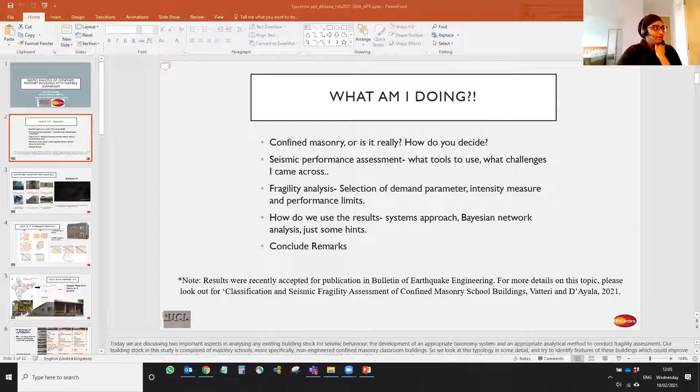Hope this is now clear, visible. Yes, it is. So today we're looking at the typology of masonry buildings with flexible diaphragms.

The typology is known as confined masonry. So first of all, we would look into this typology in a little bit of detail and see if the buildings that we are looking at are indeed confined masonry, or if it is, to what extent. Secondly, we would look into

two very important aspects of analyzing any existing building stock for their seismic behavior. We try to develop a taxonomy system that would identify the seismic resistant features of these buildings. And then we apply seismic performance and fragility analysis techniques.

You could use standard procedures and techniques for these, but I would like to highlight some of the challenges that I came across doing this. I think this would be helpful for the students who are joining our MSc programs and others who are doing similar kind of work.

So in the very final bit, I would like to just give a hint of how we are going to use these fragility curves for the multi-hazard approach Dina has mentioned in the introduction. With that, if you are into this topic, you could look out for this publication that is recently accepted with the results that I'm presenting today.

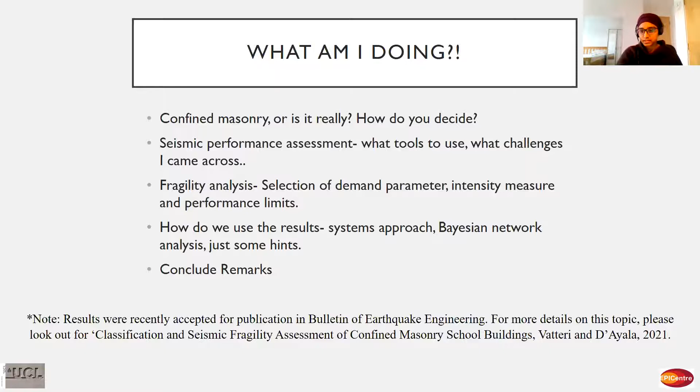So coming to this typology, many of you might be familiar with this. Confined masonry is a typology that has been in existence for more than 50 years in countries like Mexico, Chile, and Peru, where the seismic hazard is really significant.

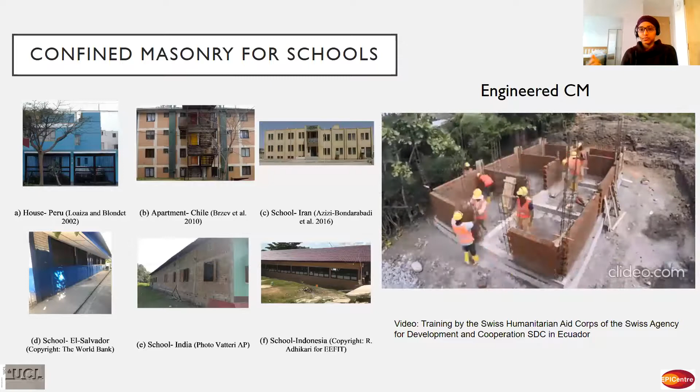This is a typology that is developed primarily from the site and then adapted to standards and codification, and now there are national and international guidelines available for this. So what it consists of is unreinforced masonry panels confined by lightly reinforced concrete elements, which tie them together like a box.

Primarily, these are used for residential buildings, up to 4 or 5-story flat structures even. But increasingly, this is being used for school structures. And as you might be aware, school buildings are inherently more vulnerable to seismic hazards because of their larger spans and larger openings and so on. So we are looking into this very interesting typology in the context of school buildings.

Also, because this is a typology primarily originated from site and improvised over time, you can see a lot of variability within this typology around the world. So we try to incorporate our attempt into how well you can classify them, the non-engineered confined masonry construction practice around the world. These kind of buildings, in the first instance, look very similar to an RC frame structure with masonry infills. So how are they different, or are they any different?

If you look in the figure on the left, the RC and CM, that's confined masonry construction, primarily differs in a number of ways. First one is the sequence of construction.

So if you noticed from the previous video, in confined masonry you build the masonry walls first, sometimes even leaving toothed edges, and then cast the RC elements. You can imagine the kind of bond that creates between the RC and the masonry. On the other hand, in RC you create the frames first and then do the infills. There's also significant difference in the relative stiffness, relative size of these elements, and reinforcement.

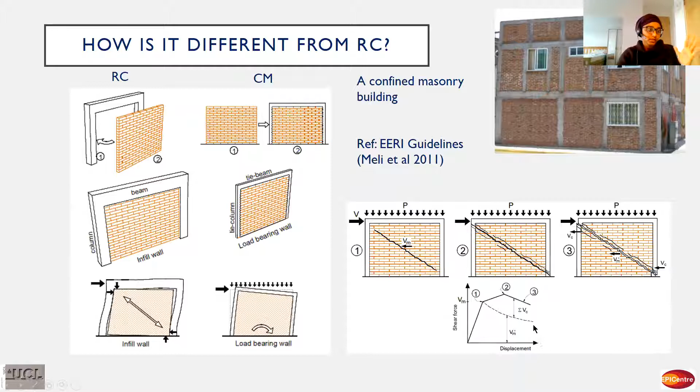So what happens is when load starts acting on the wall, initially the stiffness and strength of the confined masonry panel increases, then drops following the onset of diagonal cracks - you can see that at point 1, for example. It still keeps taking further load until the critical regions of the RC elements are damaged, and only then does the stiffness and capacity drop beyond that point. By this time, you have significant ductility or deformability available for the structure.

So now we look into the specific typology that we see in India. We were fortunate to find this database of existing school buildings in this particular city called Guwahati in Assam, very close to the Himalayas. We see that, according to this database, around 60% of the buildings are confined masonry - a surprising factor because no confined masonry guidelines were available in India at the time of their construction.

So these are mostly single-story structures with flexible diaphragms with a certain level of confinement. Some have seismic bands around the lintel level, around the plinth level, some even at the sill level, and they also have RC columns at intervals not more than 3 or 4 meters.

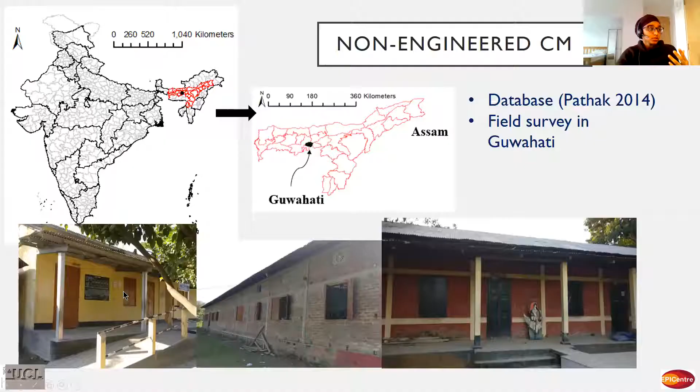So they fall into this category of confined masonry buildings, not conforming to all the standard guidelines a confined masonry building would require. So the next step was to see the level of how much this conforms to these kinds of typologies. We developed this very quick tool for assessing the level of conformation to existing CM guidelines, checking against the international guideline by EERI and also the National Building Code from India.

Bear in mind that this National Building Code was only released in 2016, and these buildings are at least 30 or 40 years old. So at the time of their construction, even though they weren't conforming to all the guidelines by these standards, they do now.

What we see from the comparison is that most of the dimensional requirements are satisfied, although we're not completely sure about the quality of connection. Only in very rare cases where you have an unplastered wall are you in a position to judge which element was cast first and which came after.

So although it conforms to dimensional requirements, we find some very important factors missing in these buildings. For example, they don't have cross walls at the required spacing, or confinement around openings, which is required for a standard confined masonry building. Also, because they're flexible roof buildings, they're supposed to have at least a roof band at the top, which is missing in most cases.

So we see that these buildings could be somewhere in between the guidelines provided at the time of construction - that is IS 4326, which gives seismic strengthening of masonry buildings in the form of seismic bands and some seismic vertical tie elements. But these are not fully conforming to either of these, so we could still check their performance as a confined masonry building.

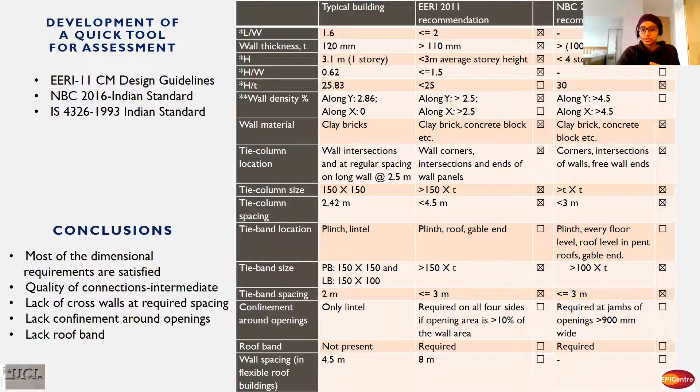For this, we wanted to incorporate a taxonomy system that could identify their available features and recognize their deficiencies. So we used this global library of school infrastructure, the GLOSI system, as a base, which was developed also at UCL for a World Bank project. Out of the 12 parameters the original GLOSI system has, we could still go with the same definitions for at least 8 of them.

We see that 4 of them require modifications: mainly the main structural system, seismic design level, wall panel lengths, and wall opening sizes. So definitions and attributes of these are modified to incorporate these features of confined masonry buildings. Now, the seismic design level is the most important parameter that distinguishes between non-engineered and engineered confined masonry buildings.

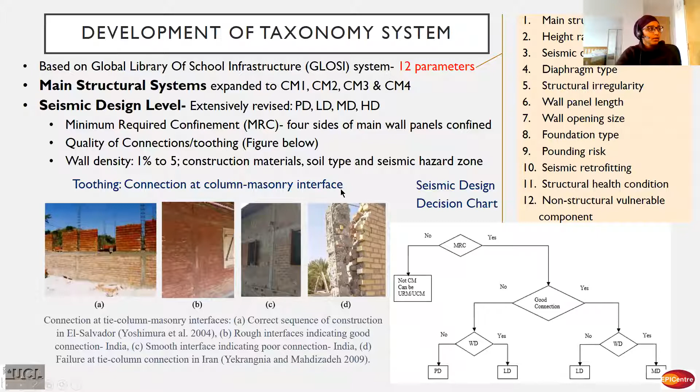Now coming to the other two factors: wall openings is another very important criterion, which has proven critical in past earthquakes, sometimes causing partial or even complete collapse. The confined masonry guidelines tell you that you need confinement around large openings. Again, the definition of 'large' varies between national codes from 5 to say 35%. The EERI guideline gives a criteria based on experiments as 10%. For school buildings, it's not really practical to have such small openings, less than 10%, so what is recommended is to have larger openings, but confined.

So in the taxonomy we have three such attributes: small openings, large openings with confinement, and large openings without confinement. Similarly, there is the wall panel length, which must be defined separately for confined masonry buildings, because it's defined in terms of the spacing of the tie columns rather than the cross walls—though both are very important criteria, as we'll see as we go into the analysis.

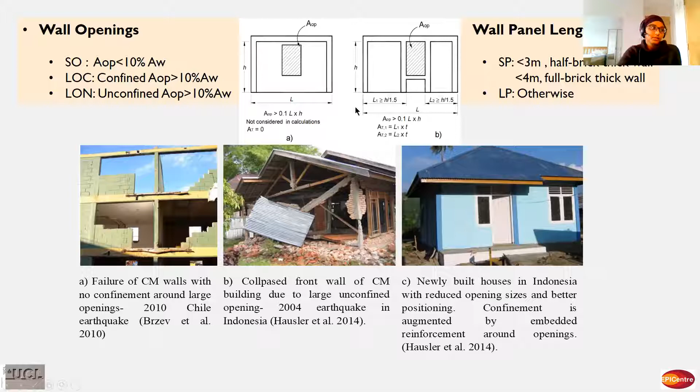Based on all of these definitions, we identified at least 6 index buildings based on these 12 parameters, and clubbed their taxonomy strings together to see what percentage of buildings belong to each index building typology. We see that the most important parameters distinguishing them are the level of seismic design and the plan irregularity.

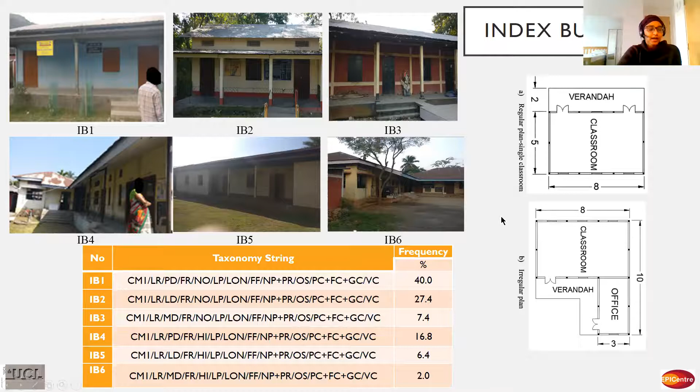So once we have these index buildings, what's the next step? You want to be able to assess their capacity through a numerical platform. We have heard of, and used, finite element or discrete methods before. What we used in this study is called the applied element method, which combines both beneficial aspects of finite and discrete element methods.

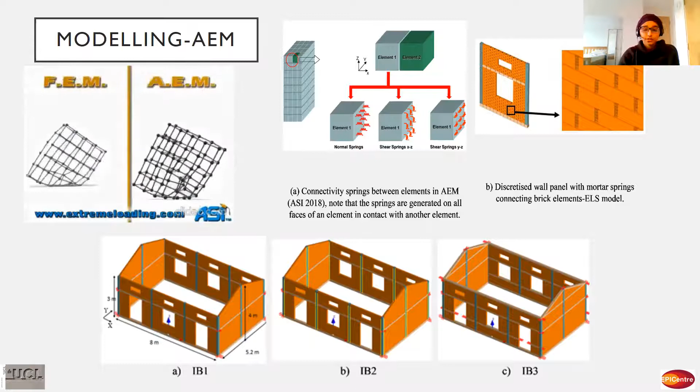So what it does is you discretize your structure into rigid elements that are connected by normal and shear springs, distributed along the faces of these elements as you can see in this figure. These springs capture the stress and strains due to loading in the volume of material attributed to each spring. The elements themselves are rigid, and the deformation, stress, and strain are captured through the springs. The material properties you input will be transferred as a property of the spring.

So now we have two criteria based on which you will have permanent cracks or open cracks. The good thing about this approach is that you do not need predefined modes of failure or predefined crack locations. It actually allows you to have collapse analysis up to the collapse stage. It has a stress-based and a strain-based criteria.

When the stress exceeds the material capacity you have given, the open crack starts forming, and it extends to a level where the strains exceed a given separation strain value. Only after the separation strain is exceeded do the springs go invalid or broken. This happens organically in the analysis.

This is from one of our masonry walls, and you can see the springs forming between the brick and mortar. So when you have an interface element, it will have an equivalent property—either you input it directly, or you can derive an equivalent property for the material.

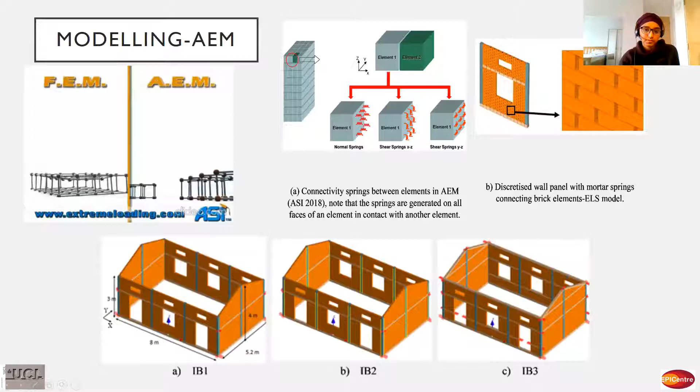Now, once you have the models, you want to do a pushover analysis the simplest way possible. But they all have flexible roofs, so there's an issue of where to apply the load or displacement. So we tried different ways.

We first went back to a simple wall, which we used for validating in the first place, and tried a force-based concentrated pushover at the top beam, which replicated the experimental envelope pretty well. Then we tried distributing the load along the height of the wall, and to get the same displacement levels, you need higher levels of loading.

Finally, we applied a ground acceleration similar to an actual earthquake scenario, except instead of a time history, we used a monotonously increasing load to simulate a pushover effect. We also tried this with a fictitious building—one of our index buildings with a rigid roof—and we can still see the same effect.

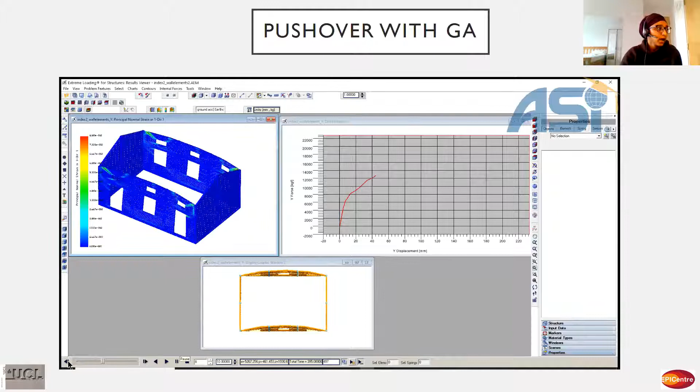If you look at it, the curve keeps progressing even after parts of the building have practically collapsed. So we need to identify a position at which we could say, okay, I'm stopping the analysis at this point. We consider some criteria for this.

Now we go into each of these buildings and analyze their behavior separately. For IB1, in both X and Y directions, the behavior is very much local—the wall portion above the lintel band just overturns and collapses, even before mobilizing the rest of the building's capacity. In the case of IB2, you still have the cantilevering out-of-plane mechanism, but there is some horizontal action forming between these out-of-plane walls.

The in-plane walls in this direction and this direction remain almost intact. Coming to IB3, you have a much better global performance when loaded in the X direction because of the better confinement, and the out-of-plane walls are able to transfer loads to the in-plane walls, giving you the shear cracks you'd expect in a typical confined masonry building with rigid roofs. So confinement is very effective in the X direction, but not as effective in the Y direction.

We also checked the participation of the walls in each building and found that in IB1 and IB2, the in-plane walls do not participate at all, while in IB3, they do. This raises the question of what you consider your engineering demand parameter. If you go with the average, you'd be underestimating the displacement capacity in these two cases at least, and if you go with the out-of-plane maximum displacement, that would be overestimating it.

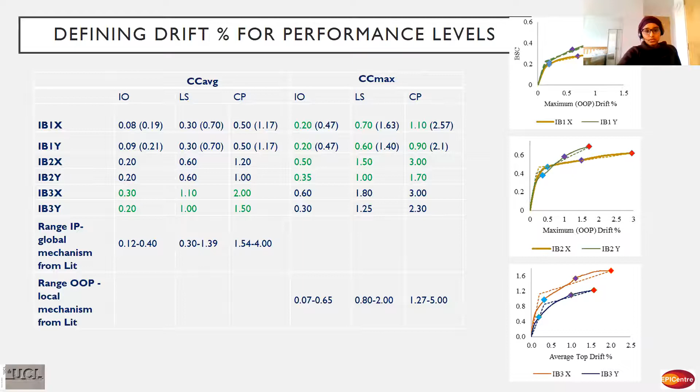You could use something like the N2 method with a suite of ground motion records and your capacity curve in acceleration-displacement spectral space to derive your performance points, along with the drift limits defined for each performance level. Then a simple least-squares error method can be used to derive the fragility parameters of the log-normal distribution.

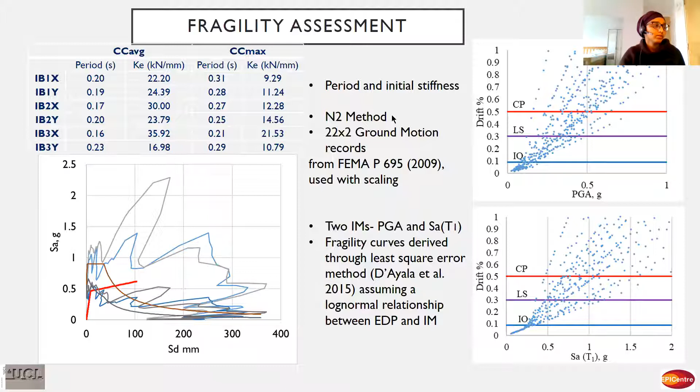So what we see is that just improving the confinement of IB3 alone is not providing much enhancement to its seismic performance. We need to consider additional measures such as adding cross walls, having stiffened diaphragms, or at least improving wall density by increasing wall thickness.

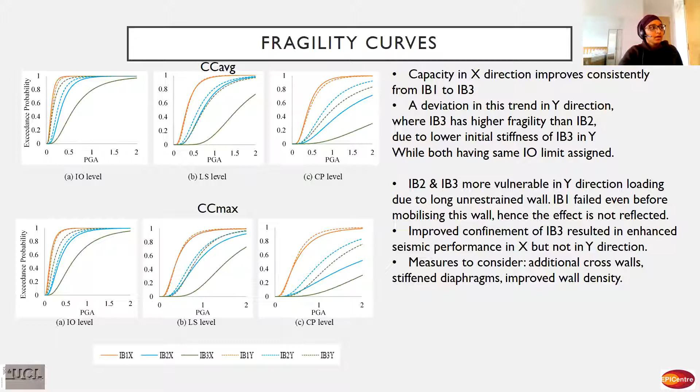Now coming to... it's always easier to compare and have a meaningful comparison between different buildings and techniques when you compare at a particular level of intensity. So we look at the maximum considered earthquake at 0.36 G for this location.

We see that in most cases the CC average approach predicts a more conservative result, while we know that the CC max approach is capturing the behavior in a better way.

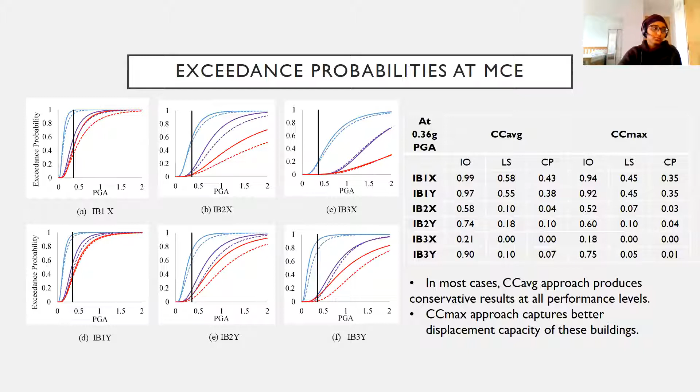So we do this analysis for two of our intensity measures, that is PGA and spectral acceleration at the first fundamental period, and we compare them at the same maximum considered earthquake to see if any of them has a better performance or which is more suitable.

We see that the Sa-based fragility curves give a higher probability of exceeding individual performance levels compared to PGA. But when you compare the dispersion of the curves based on both IMs, they are not consistently better than the other. So we conclude that both are suitable for this kind of analysis.

Again, here we can see more clearly the conclusion from before, that the CC average approach is consistently more conservative.

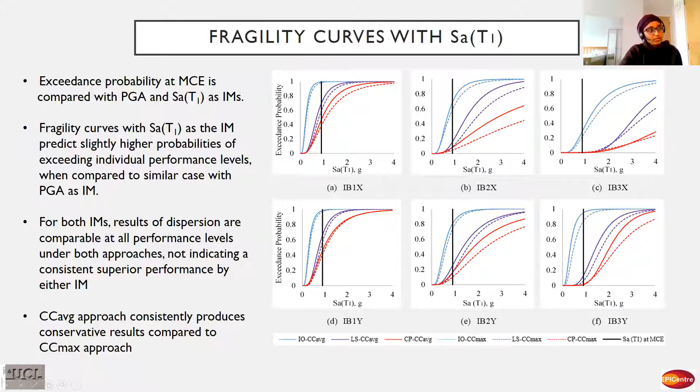Here we have now everything you need from a fragility analysis. Next question is, how do we use this? Our ultimate aim is to look at the school compound as a system and assess the system performance from various factors based on the fragility curves we have derived.

For example, if you look at a case with 3 buildings in a campus, each with single or multiple functions like classrooms or offices, they all feed into the final ultimate system. For the system to be performing intact, all of them have to be performing in a certain defined way. So you input the earthquake hazard into the system, apply the fragility curves, and see how the system performance changes for any scenario.

For example, we consider another system with 4 blocks instead of 3, and see how the probability of teaching in classrooms changes with just this one change.

This is also very useful when considering different retrofit options. For example, if you have 3 IB1s in the campus, you might want to retrofit so that all of them reach IB3 level of performance, and see how the final system performance changes, what the benefits are in quantitative terms, which can also easily be extrapolated into financial terms.

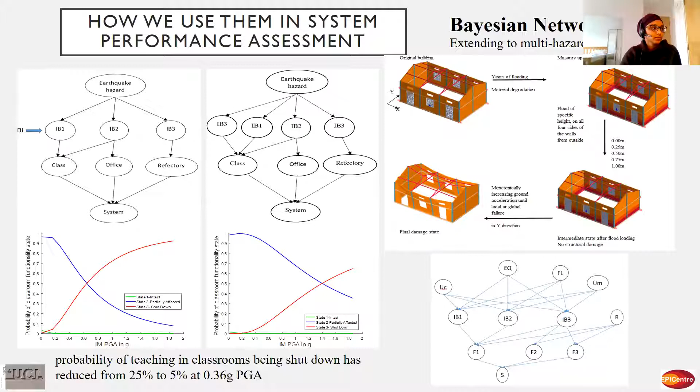I think this gives an idea of how we would use the fragility curves being derived here. With that, I think I have almost covered everything I wanted to discuss today.

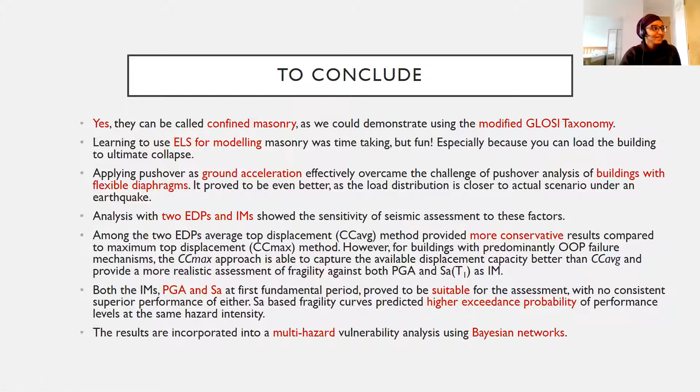Yes, the first question is, yes, they are confined masonry. With the developed modified taxonomy, we now have a measure of to what extent they are confined masonry in terms of their seismic design levels.

Using this new technique of the applied element method for modeling, it was very new and time-consuming, but very interesting to learn and analyze using this technique, especially because you can go all the way to the final collapse of the buildings.

The next challenge was to use the pushover analysis technique for buildings with flexible diaphragms, using ground acceleration instead of a force or displacement based regular pushover. The comparison between two EDPs and two IMs that we can use for a fragility analysis shows how sensitive these procedures are to the assumptions we make. Both PGA and spectral acceleration seem to work fine for this kind of analysis as IMs.

For EDPs, we see that the CC max would capture the behavior better, but if you want to be more conservative, you need to go for the CC average approach. So I would stop here and leave it to the audience if you have any questions or clarifications.

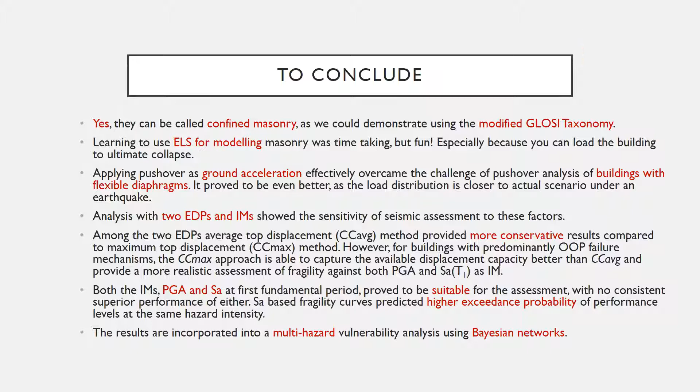I will start with the question: how did you define your collapse? Could you please repeat, how do you define the collapse damage state?

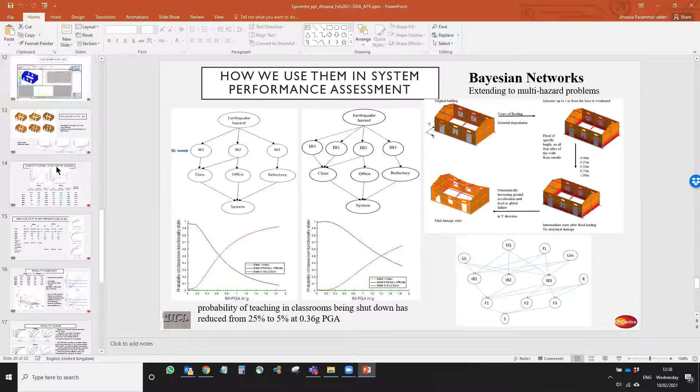So I was looking at the model you had, and I could see that some of the walls were failing out of plane, while some continued even after the out of plane failure. Don't you stop the model when the first out-of-plane failure happens and consider that as collapse, or is it more complex than that?

No, it's mostly what you just said. Even though the in-plane walls stay intact, it doesn't really matter as long as the out-of-plane walls are completely or partially collapsed. Especially considering we are looking at school buildings, life-threatening damage is what is considered collapse, to be very specific, because even the top portion above the lintel band falling into the building is sufficient to be life-threatening.

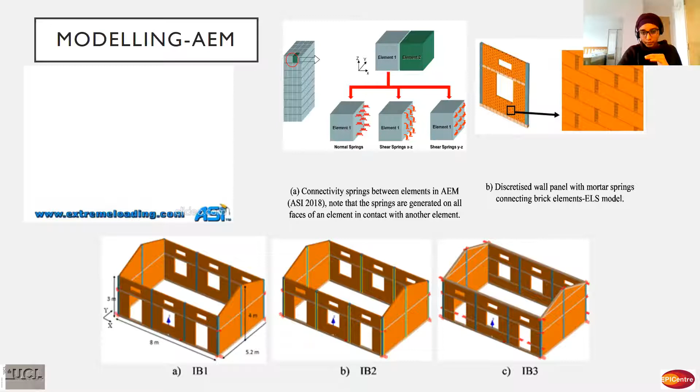So in this case, especially because we are giving the ground acceleration, it's a force-based approach. So we do not have control over the degrading portion of the curve, if you would say.

If I can just add here, hello again. This particular way of modeling masonry is extremely important to have a good understanding of how masonry structures behave, because masonry structures are by default highly redundant, since all the material can perform the same functions. In a wall, to transfer the gravity load and lateral load, you don't need all the joints and all the bricks to work at once. It's because usually when they work all at once, the level of stress and deformation is very modest with respect to their capacity.

So when a number of diagonal or vertical tensile cracks develop, as you can see in the pictures that Ahsana is showing, there are still load paths that can be identified in any of these masonry portions.

And those load paths allow transfer of both vertical gravity loading and lateral loading as we simulate the earthquake. Of course, once the geometry of the deformation is such that any portion of these walls becomes unstable, then we cannot consider them as still performing in a structural sense. So that's where we decide the analysis is not meaningful anymore.

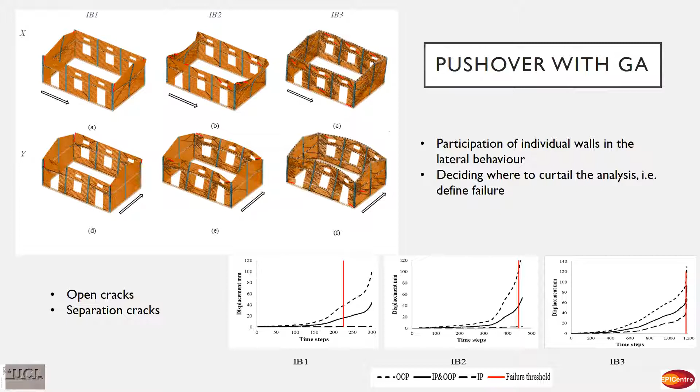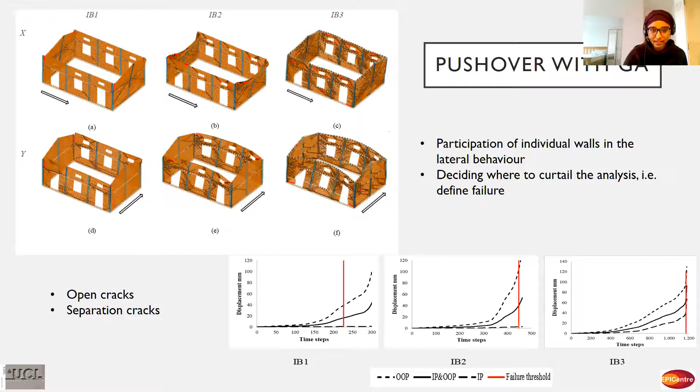I am very sorry, I forgot to mention that these are deformations magnified 10 times. So if that gives you a wrong impression that these are the actual deformations, I'm very sorry. But the directions of the deformations you can see are correct as it is.

And the other thing, as Dina mentioned, this software is very specifically and extensively used for blast simulation and progressive collapse, for example, and it does really go to that extreme loading.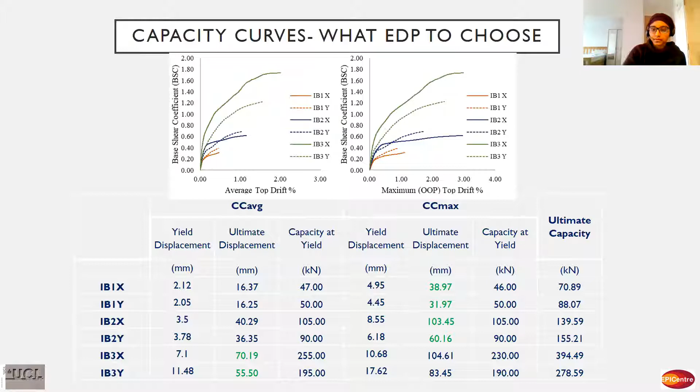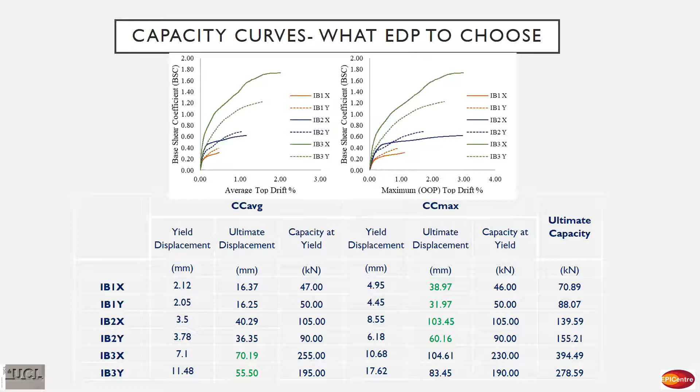Roberto here. Thanks, Ahsana, for the nice presentation. My question is, are you planning to check against time history analysis with this software? Because it seems very, very promising.

Yeah, that is one of our aims to get there. We haven't tried it on the buildings yet, but we did try time history analysis on some of the walls at the time of our validation of the numerical software for masonry, especially confined masonry, and it does perform very well.

No, the thing was, let's say for example you get ground motion with a very high frequency, that can excite your in-plane walls more than your out-of-plane walls. In this case, your capacity curve would change, and so your performance point, and so on. But I think by comparison, you can understand where the error lies and where you can trust this simplified approach, which is great.

Just to be clear, are you suggesting you do a bidirectional analysis at the same time? I mean, we were only doing unidirectional, either X or Y. Even just monodirectional. Okay, if you go to slide 13, the previous one.

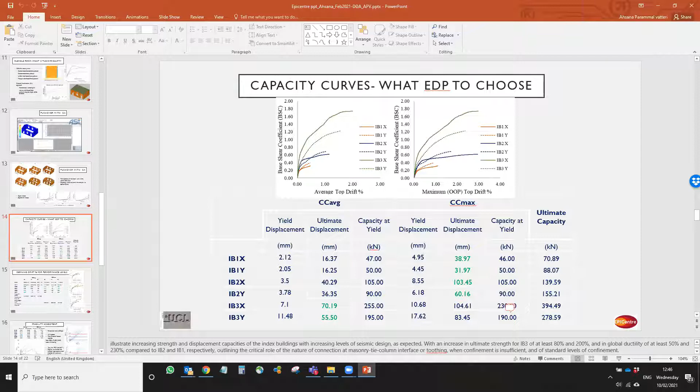So for example, in one direction, if you get a ground motion with a high frequency, you will excite your in-plane walls rather than your out-of-plane ones, and vice versa. So if you perform the pushover by assigning different loads, you can mimic this. Maybe you will need to, but you can get the same result, or at least get close to the time history result.

Yes, if I can intervene here. Yes, because we have done this with other types of projects, this particular modeling technique, and we did this quite extensively with unreinforced masonry structures. The particular positive aspect of doing the ground acceleration pushover is that you don't actually redistribute loads.

It's not a traditional pushover analysis where you beforehand determine a relationship between the forces, the distribution of forces that you will have in both height and horizontal plan, depending on initial stiffness. Here, you just input a ground acceleration. That ground acceleration is automatically redistributed to each element of the structure according to, of course, it's a static equivalent analysis, so it will still take the stiffness matrix and the mass matrix in order to determine the redistribution.

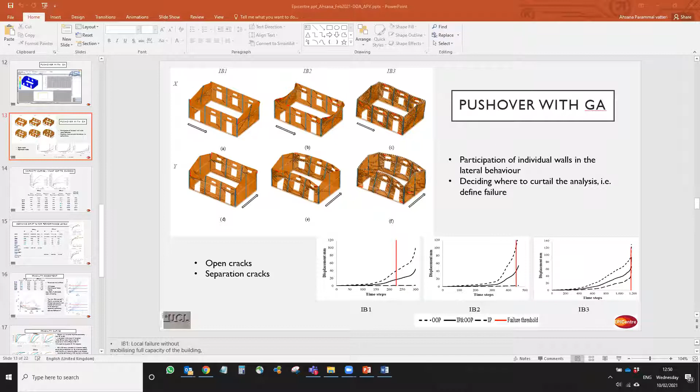Thank you for your question. Within the span of the PhD project alone, I don't know how far we would get to the retrofitting aspects of the buildings, but our attempt was to assess the available seismic capacity of the existing non-engineered confined masonry buildings in the first place, so we can see how much influence each of these components has on their available seismic performance. It definitely does have a lot of capacity improvement from IB1 to IB2.

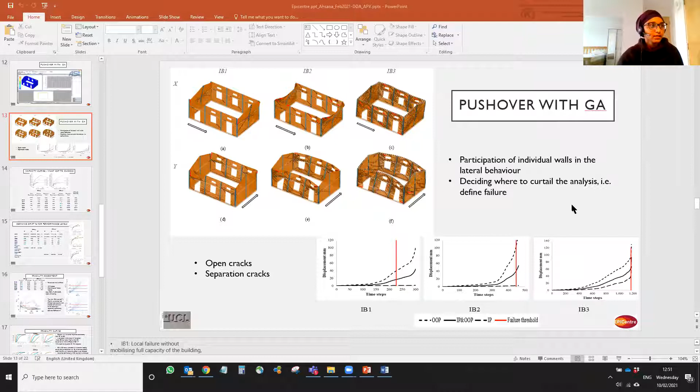To IB3, even though the displacement capacities are compromised. If you look at the maximum capacity base shear, it's really much higher than the one with poor connections and poor design level.

We also have a project planned as an additional project with the EEFIT grant, which would specifically look into the retrofitting aspects, comparing the practically available methodologies for retrofitting these structures to improve their seismic design level from, say, poor to at least medium or high.

One of the things we have concluded from the analysis so far is that just having the roof band is not sufficient to provide enough seismic performance in both directions, and it has to be supplemented with at least cross walls or horizontal bracing elements at the roof level that would improve the lateral behavior of these structures in the y direction, so that the unrestrained length of the long wall remains the most critical feature of these buildings, if you look at the larger picture.

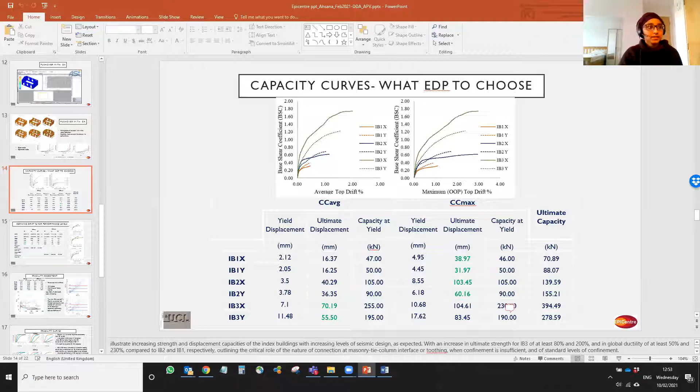This is also part of many other projects on school buildings now going on within EPICentre and within CGE, and we do hope to have some recommendations for the construction of new buildings, especially since, as you have seen at the very beginning, there are many school buildings now being constructed using confined masonry. If you look at them closely, they're not typical confined masonry buildings, they have large openings and deviations from the standard, so it would be very useful to have a recommendation for schools separately.

If I can just add very quickly, because I don't want to take time from more questions, we are doing quite a lot of work on recommendations for strengthening within the GPSS, the Global Program for Safer Schools, a World Bank program, and the GLOSI library of outcomes that we are particularly involved with. So I wish to direct you towards the GLOSI and the GPSS for more outcomes on different building typologies, both unreinforced masonry and reinforced concrete, as well as confined masonry.

Great, thanks. Newman, I can see you have raised your hand. Thank you, Arish. Thank you, Ahsana, for a wonderful presentation. You've explained things in a very simple manner, and it was easy to observe the knowledge you have produced. My question is around the validation of this.

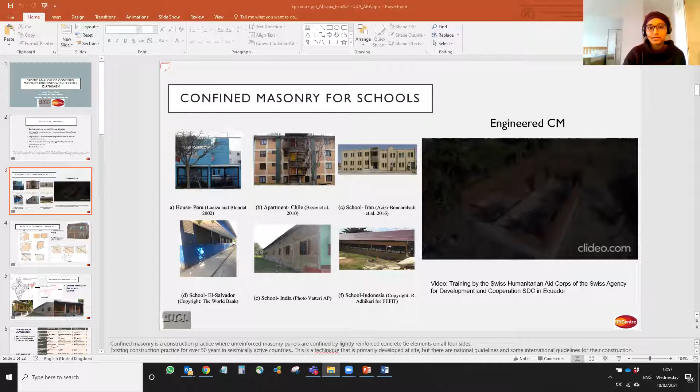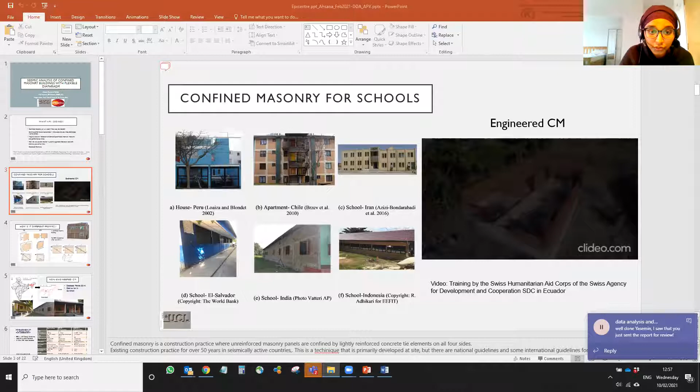For your second question, on the number of elements, I'll need to get back to you - it would just take a couple minutes to open the file. No worries, I can get in touch with you by email. If you have anything specific, feel free to reach out later if you need any assistance.